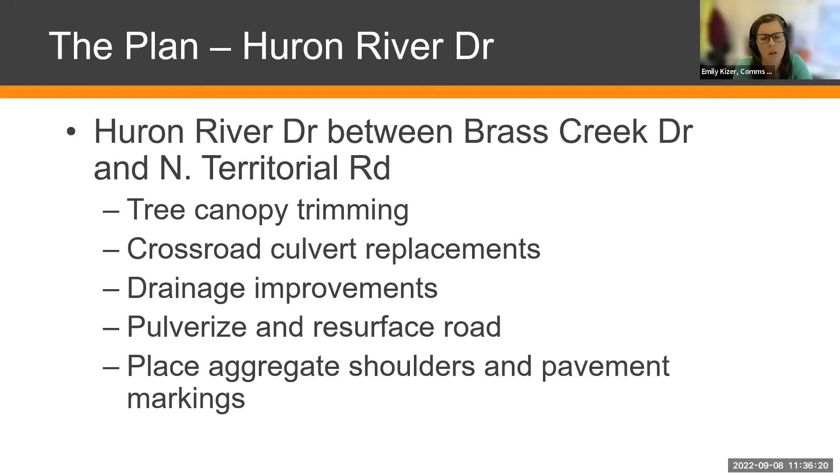Mike, do you want to talk a little bit about shoulders, and what has to happen before the road will be reopened? Well, after we place the asphalt, then we'll be putting on aggregate shoulders and striping it with new lane lines so that it'll be ready for traffic.

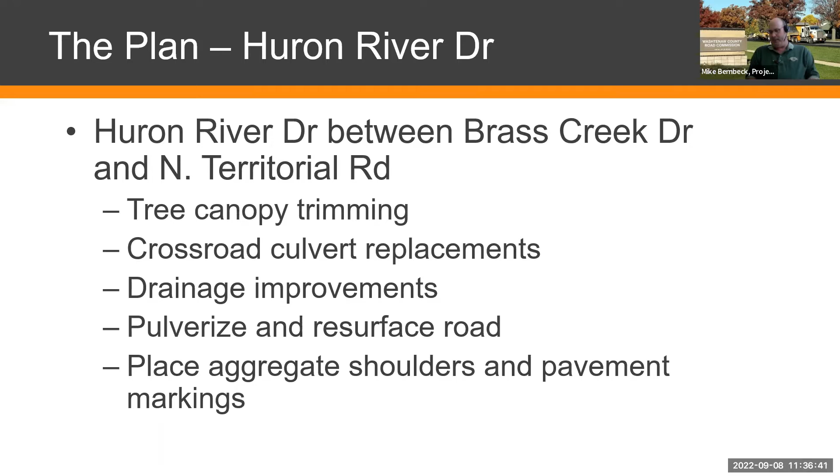Like Mike said, the road will be closed, and we'll talk about what that means and the detour in a few slides, but if you live within this work zone, you will still be provided access. There's going to be work going on, but a pulverized surface is still one that you can drive slowly on, right, Mike?

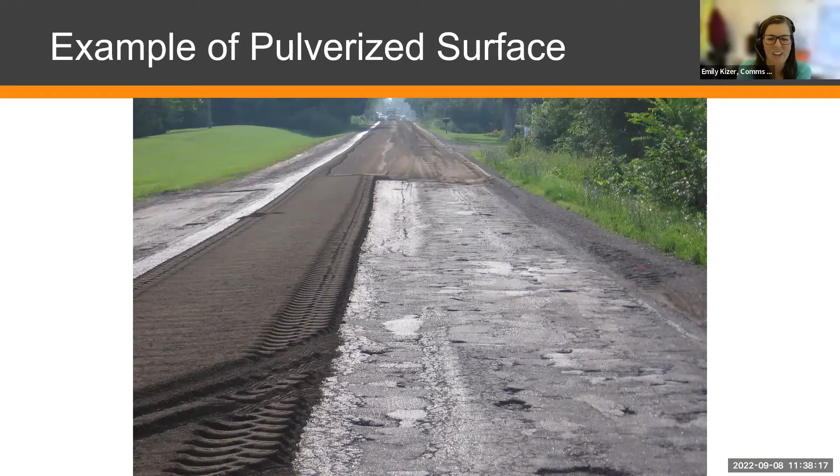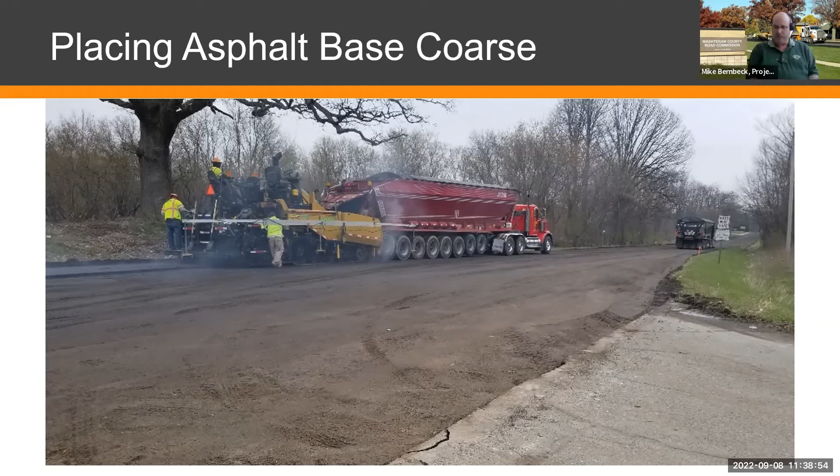So as I said, this was originally on the 2023 program of the countywide millage that was on the ballot 2 years ago, and we thank you for your support.

So it just so happens that sometimes we don't get to the job as soon as before it falls apart totally. So the road commissioner saw it was a good project for us to move forward, so we're going to do it this year, and then it'll be taken care of. We're expecting it to cost about $900,000, right? That is correct. It was a big deal, we can't always move projects forward, but we were really happy to be able to do that this year.

Once again, the project starts at Brass Creek Drive. A number of years ago, we paved from Mast to Brass Creek, so we're just starting at that point, moving forward. You will see the detour signs and road closure signs down at Mast Road because we're stopping through traffic that wants to travel up to Territorial Road or to Gregory.

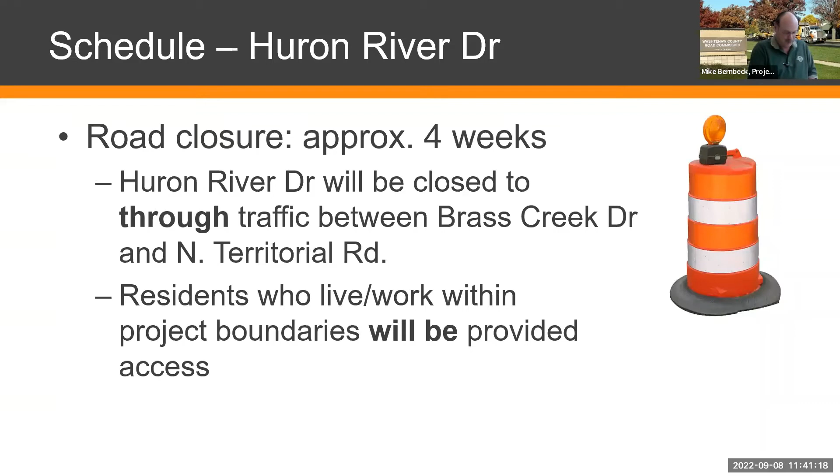So we want to catch them at Mast, and then at the other end, we'll catch them at North Territorial and bring them across to Mast and down. So that's why the description is sometimes puzzling, but that's the process we're working on. And like you said earlier, you think it'll be about a 4-week closure, but we're not sure of when that will start, right? Later this fall? Correct. But we'll let you know through Emily's work. That's her job.

And Mike, at this point, do you want to talk a little bit about when you are paving? We run into this when we're doing these pulverize and resurface projects with major paving to do, where you pave in one direction, right? We'll provide updates if people subscribe to receive project updates, I'll talk about that in a few slides, but do you want to talk about what paving days look like when we have a map up?

Yeah, we try to pave the roads and have traffic moving with us, because in a one-way situation, and probably on this job we'll be coming from North Territorial south, with the trucks leaving and going back out different ways. I'm not sure where we're getting our material from, it's either Rawsonville at 94 or Wagner Road and Liberty, but that's a function of Cadillac's, our contractor, that's their business. When we're paving, we try to let traffic go whichever way the trucks are coming and moving through the project, and it just makes it safer and easier for everyone. We try to pave one lane at a time, the complete lane, so we don't have any joints, and it makes for a much smoother road when we're done.

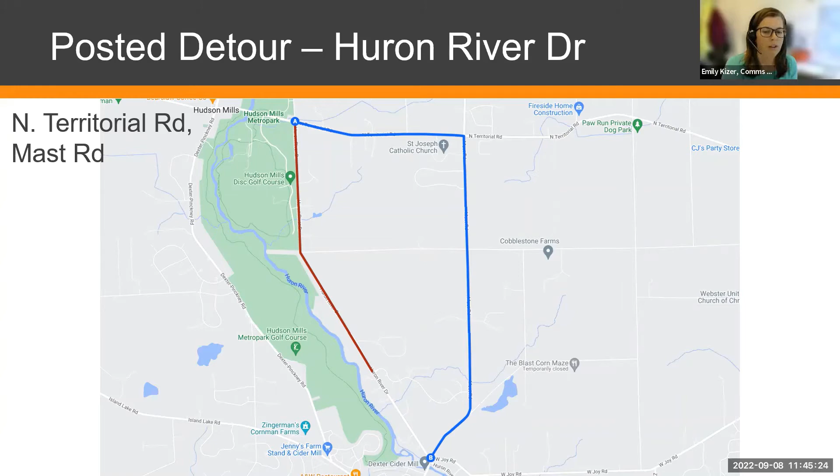Yes, and while we're there, if you have family or friends coming to visit you, they certainly can come in. They're coming in to see you because you live within the road closure, so they're part of that local traffic only piece of it. But for people just using it as a commuter route, that's where road closed means your road closed, and please use the detour route. And that's why we have the detour route for you.

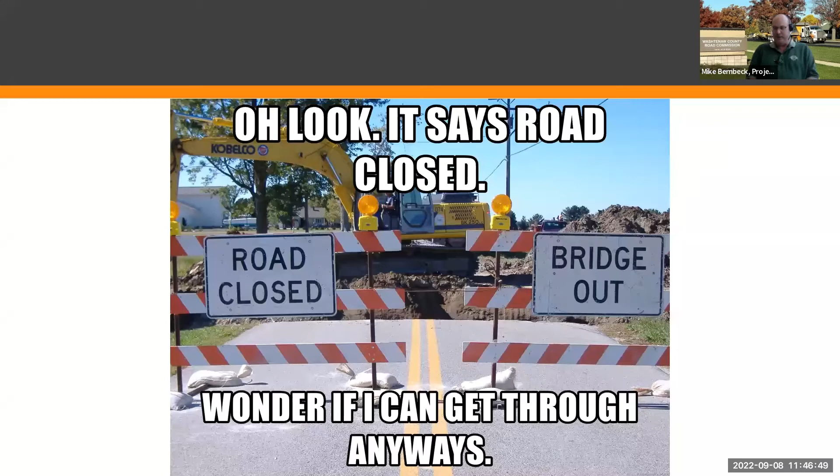Okay, so the next slide we've got here is about all the different work we have going on. Luckily, this is a little later in the season, so a lot of this work is in progress right now or has been completed.

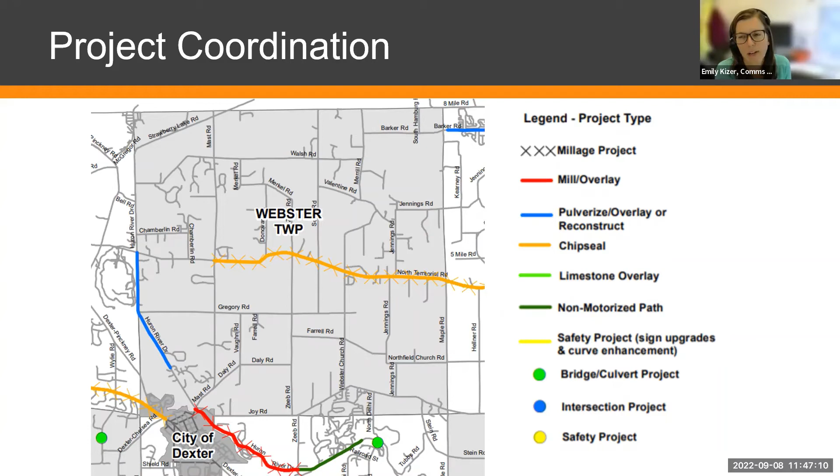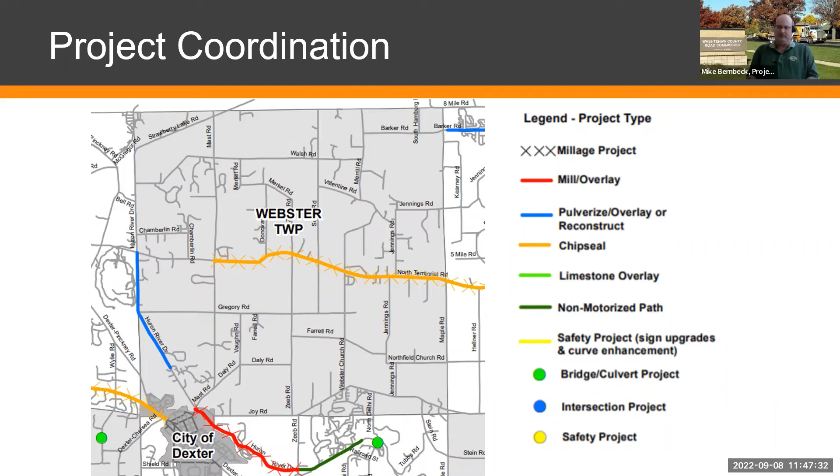So, Mike, is there anything you wanted to comment about project coordination on the mill and overlay on Huron River Drive? No, I think we're in good shape because the work up on North Territorial will be done in the next few days, weather permitting, so I don't see anything, other than the weather, that's going to interfere with us completing our work efficiently. Hopefully October will be as nice as September has started.

So going back to the closed roads, that is stipulated, and we do help let the mail delivery come through, the school buses, the local trash pickup, and anybody coming in for services you need, such as lawn service, UPS or FedEx. We work with those people all the time, and by the time we get the asphalt there, we'll have met probably everybody, so everybody will know what the deal is.

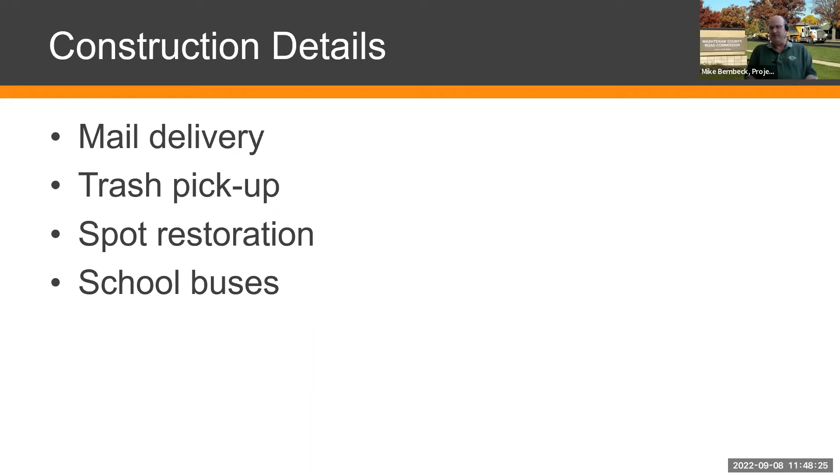That's the stipulations of our jobs. And then the turf restoration or spot restoration, if we disturb grassy areas, we'll put back seed. Expect that comes usually into play with some of our drainage improvements that we'll have to do.

All right, so with that, we're almost to our Q&A period, and we've got some great questions coming in through chat. I wanted to take a minute to share our website and show you how you can find the project page.

So this is a shameless plug for our website in general. We're at wcroads.org, and there's a ton of information out there for the public about the road system in Washtenaw County. We've got a really robust FAQ section, and a way that you can submit potholes or other road requests right through our website. I encourage you to check out the whole website.